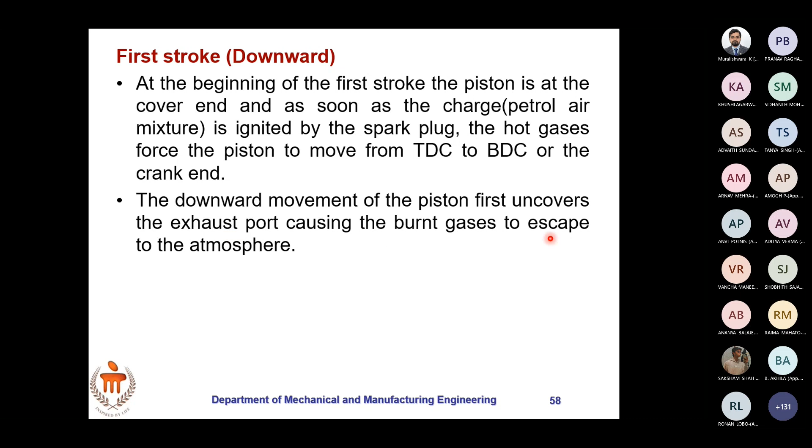As soon as the charge is ignited by the spark plug, the hot gases force the piston to move from TDC to BDC, the crank end. The downward movement first uncovers the exhaust port, causing burnt gases to escape to the atmosphere. Next, further downward movement uncovers the inlet port, then covers it, stopping the entry of fresh air-petrol mixture into the crankcase, and compressing the already drawn fresh charge in the crankcase.

As soon as the top edge of the piston uncovers the transfer port, during further downward movement, the compressed charge from the crankcase flows into the cylinder. This compressed charge entering the engine cylinder pushes the exhaust gases out of the cylinder.

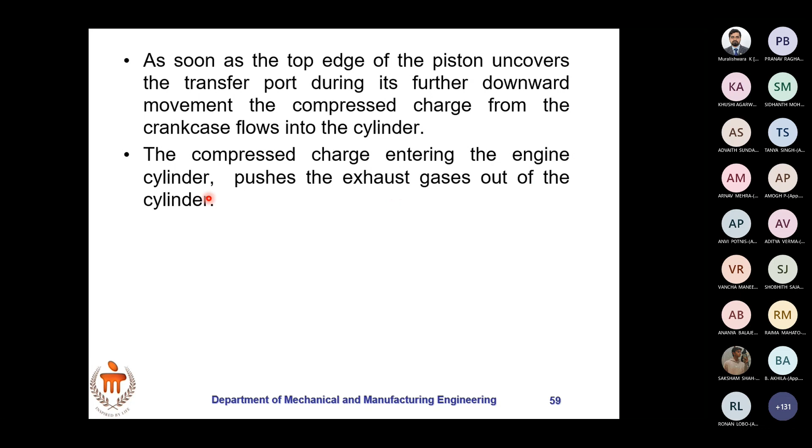This is called scavenging - the process of removal of exhaust gases by the fresh incoming charge. Look at this important point: the fresh charge displaces the burnt out gases. That is called scavenging, and all this happens during the downward stroke.

The scavenging continues till the piston covers the transfer and exhaust ports during the next upward stroke. During this stroke, the crank rotates half a revolution.

In the second, or upward, stroke, the piston moves from BDC to TDC. It first covers the transfer port, thereby stopping the entry of fresh charge into the cylinder from the crankcase.

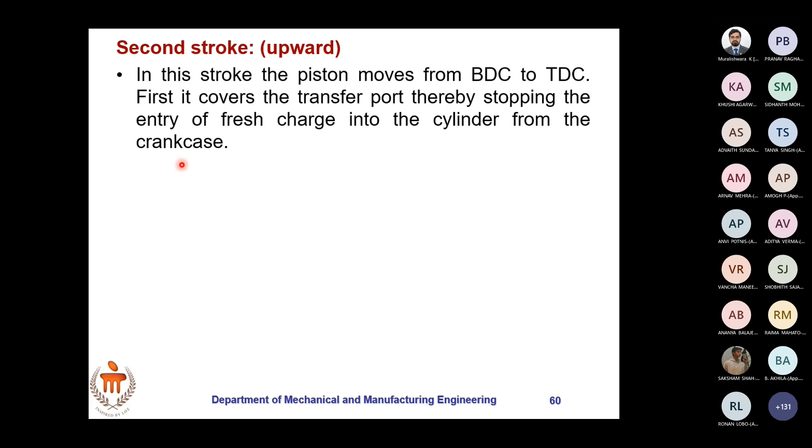With further upward movement, the piston uncovers the inlet port, creating vacuum in the crankcase, and fresh charge starts entering into the crankcase on the other side. Further upward movement, the piston covers the exhaust port, stopping scavenging, and compression of the petrol-air mixture in the cylinder takes place.

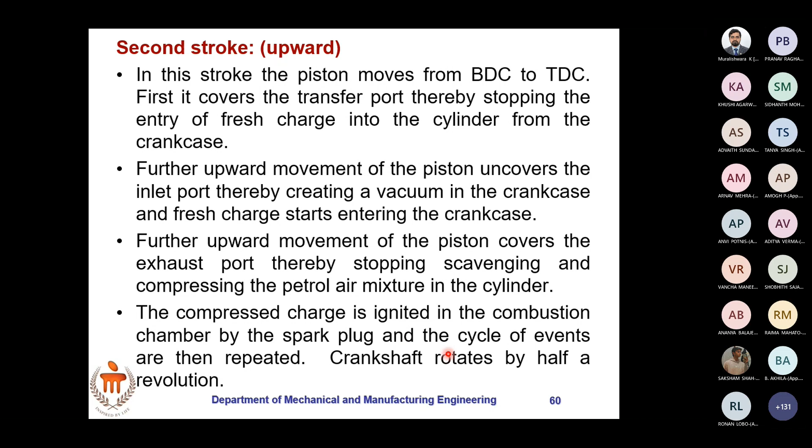The compressed charge is ignited in the combustion chamber by the spark plug, and the cycle of events repeats. The crankshaft rotates by half a revolution. So this is what is happening.

So, the concluding remarks for the 2-stroke petrol engine: this engine requires only 2 strokes to complete 1 working cycle, or all 4 activities. The crankshaft makes 1 revolution to complete 1 cycle, half revolution per stroke. The power is developed in every revolution of the crankshaft - look at that, every revolution you get power.

The energy developed in the first stroke is stored in the flywheel. Energy required to perform the second stroke is provided by the flywheel itself. A smaller flywheel is required since power is developed in every revolution of the crank, so it only has to supply power for half a revolution.

At the start of the engine, the energy required to perform the stroke is provided by cranking, as usual in the 4-stroke engine. To initiate the working cycle, cranking is required.

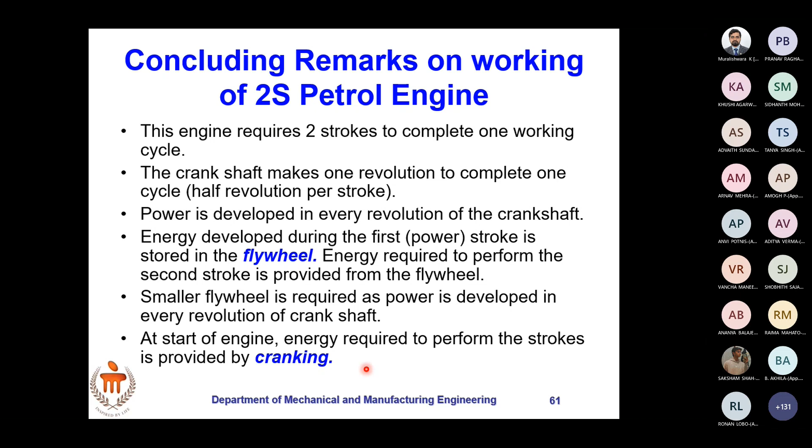Now the 2-stroke diesel engine is exactly similar to the previous case. The only difference is the spark plug is replaced by a fuel injector, and only air enters instead of charge. So during the downward stroke, look at what happens.

Only air enters, so air enters into the crankcase, and on the other side the fuel injector injects fuel so that burning takes place. The product of combustion exerts pressure on the piston face, and the piston is pushed down - this is the downward stroke.

What happens: first it uncovers the exhaust port, so burnt gases move out, and when the transfer port opens, the charge already entered in the crankcase enters the cylinder area, the combustion area.

During the downward stroke, this exerts pressure on the charge filled in the crankcase, so that it is pushed to the cylinder area, and not only that, it pushes all the burnt gases out to the atmosphere also. That is called scavenging - that's what happens in the downward stroke.

Further downward movement covers the inlet port, so that the air entry into the charge is completely stopped. This is what happens in the downward stroke.

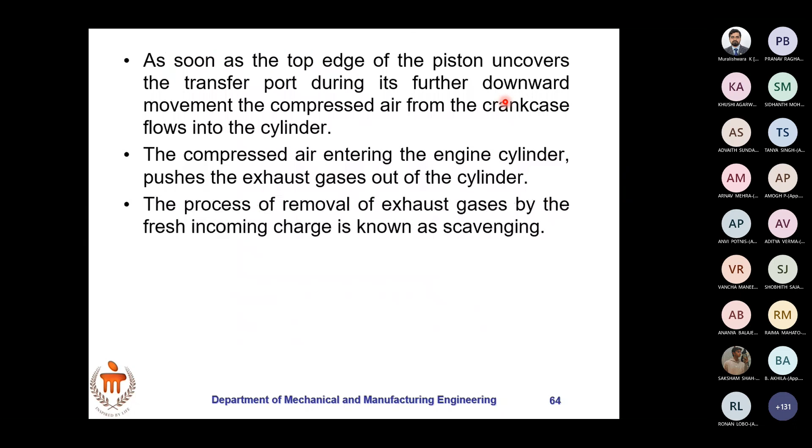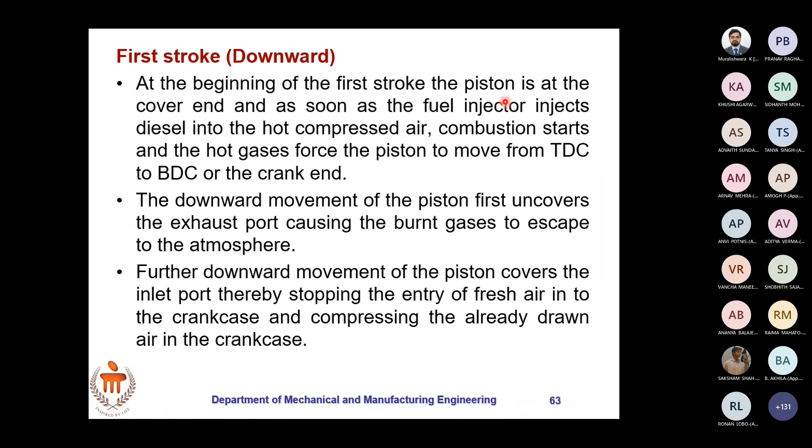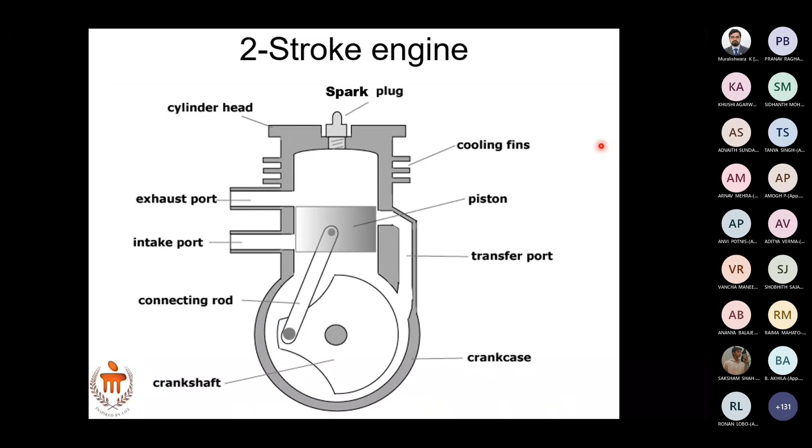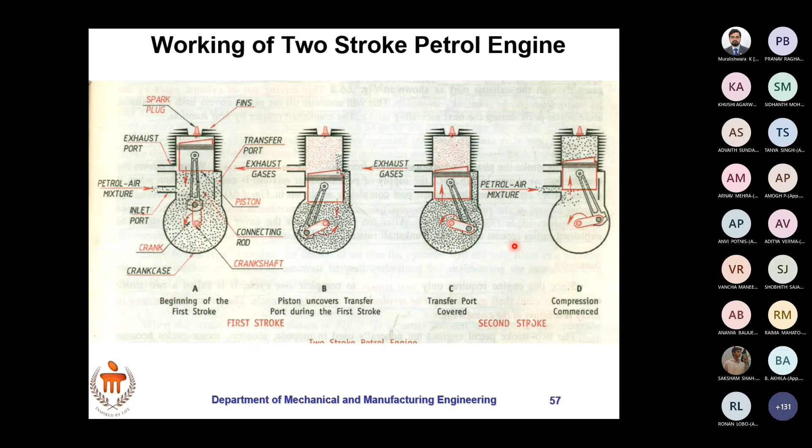Pistons are crowned, a taper type. This enables the burnt out gases to move out much easily through the exhaust port. So all two-stroke engine pistons are being crowned. What is the meaning of crowning? A slight taper is provided on the face, not flat pistons. This is one important thing I missed explaining in my previous class.

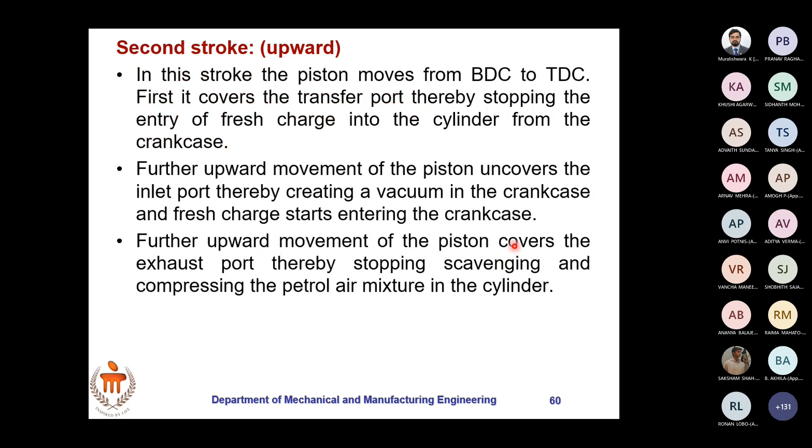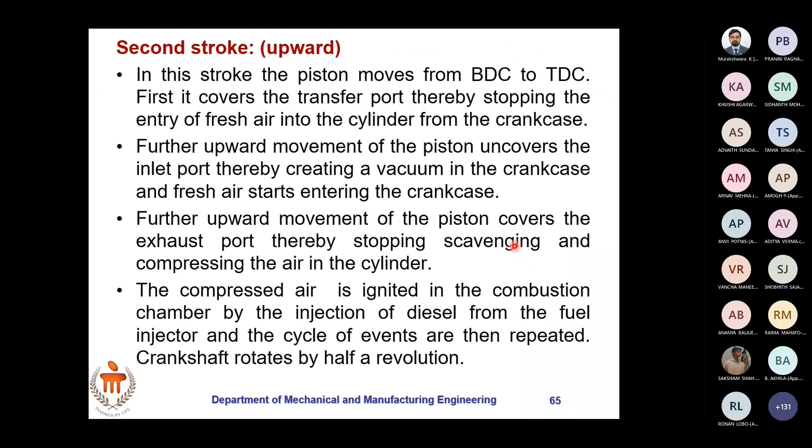All these pistons are crowned. Then we have comparison, conclusion, remarks on two-stroke petrol engine which we already covered in our previous class comparing four-stroke to two-stroke. Every alternate crank you will get power in four-stroke. Here in two-stroke, every revolution you generate power.

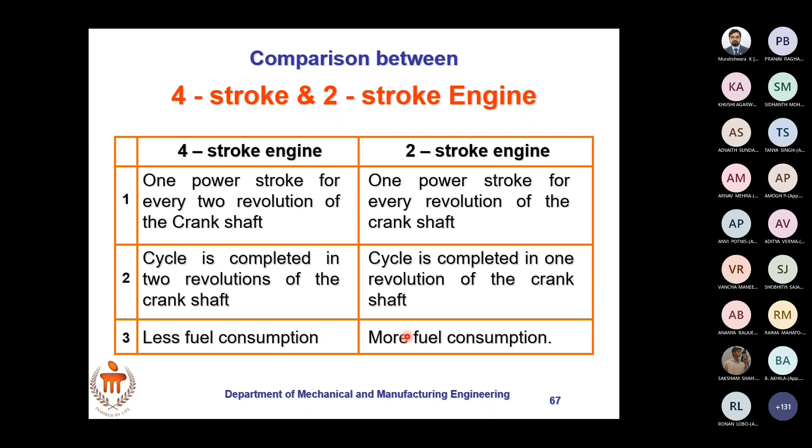So activities are more rapid in two-stroke engine. The vibrations are more, sound is more, and many problems are there. Cycle is completed in 2 revolutions for four-stroke, cycle completed in 1 revolution for two-stroke. Less fuel consumption in four-stroke, more fuel consumption in two-stroke, because there are a lot of unburnt hydrocarbons. Since there is absence of valves, some unburnt hydrocarbons and some fresh charge may go out along with the burnt out gases.

That's why fuel consumption is more. Higher thermal efficiency in 4-stroke because of complete combustion; lower thermal efficiency in two-stroke. Engine design is complicated in four-stroke because of valves, seatings, and cam operation - very complicated design. Here in two-stroke, just ports, and opening and closing of ports is done by the piston itself, by covering and uncovering the ports. Lesser rate of wear and tear in four-stroke, higher rate in two-stroke because it is very rapid.

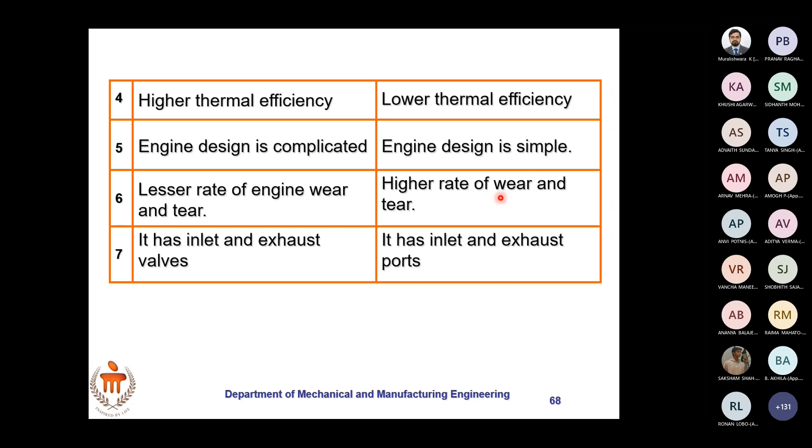Activities are very rapid in a 2-stroke engine, so wear and tear is more. Four-stroke has inlet and exhaust valves, two-stroke has ports. Four-stroke engine is heavy and bulky because of heavier flywheels, whereas the same power two-stroke engine is light and compact - no camshaft, no valve mechanisms, and no heavy flywheels in two-stroke engines. Whereas in four-stroke everything is there, that's why it has become heavy and bulky.

Two-stroke requires lesser cooling and lubrication... wait, four-stroke requires lesser cooling and lubrication while two-stroke requires greater cooling and lubrication. Why? Because activities are very rapid with more movement, so lubrication and cooling requirements are higher in two-stroke. In four-stroke, every alternate revolution power is developed and fuel is burnt, so cooling is much easier compared to two-stroke, where every revolution there is burning activity. Cost is cheaper for two-stroke engines.

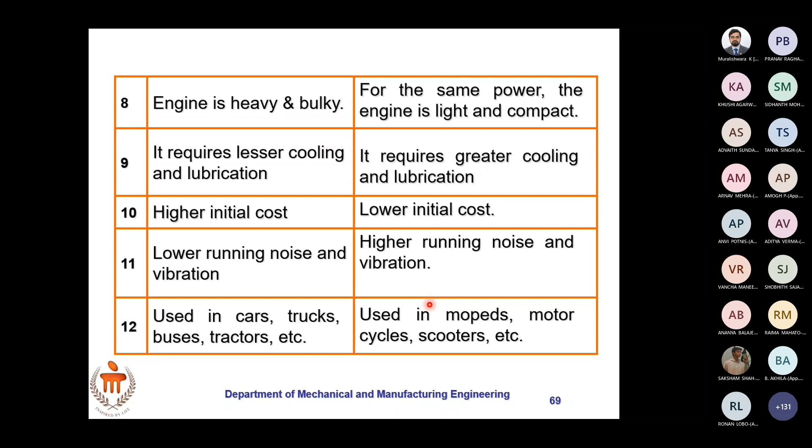You know the reason two-stroke engines are cheaper. Four-stroke has lower running noise and vibrations; two-stroke has higher running noise and vibrations. Four-stroke engines are used in cars, trucks, buses; two-stroke used in mopeds, motorcycles, scooters - but this is pertaining to our old concept. Nowadays, because of efficiency, all scooters are also four-stroke. This is pertaining to previous designs. Now these two-stroke engines are very rarely used because of expensive fuel and poor efficiencies.

Are there any questions? No, sir. No sir, okay then we'll go to... Sir, one minute, can you explain the crowning of the piston again? Crowning, okay.

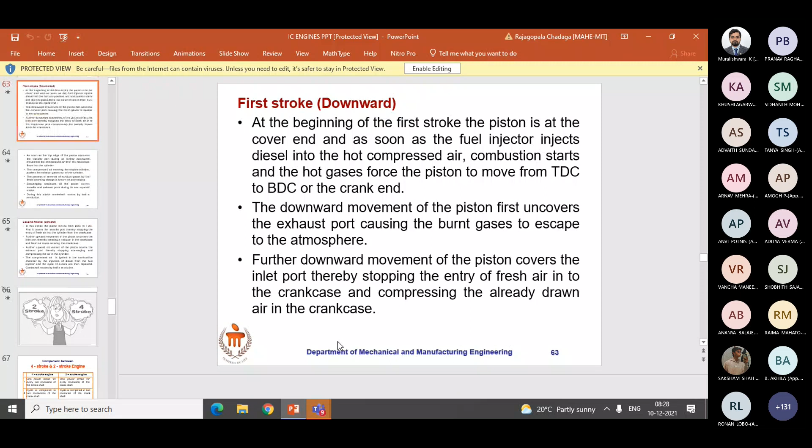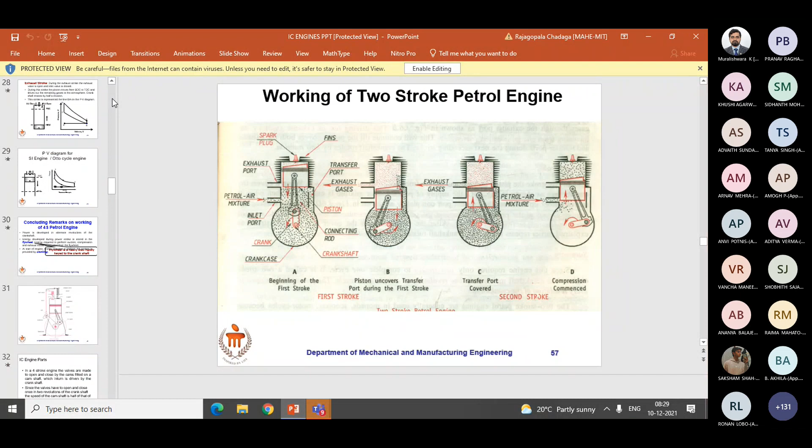Look at that crowning shape. Piston shape in two-stroke engines are just tapered towards the port side. This is called crowning. Whereas in case of four-stroke, one minute - four-stroke pistons are flat, this again is two-stroke. Look at that, they are flat. Have you noticed this? In a four-stroke engine, pistons are flat. But in a two-stroke engine...

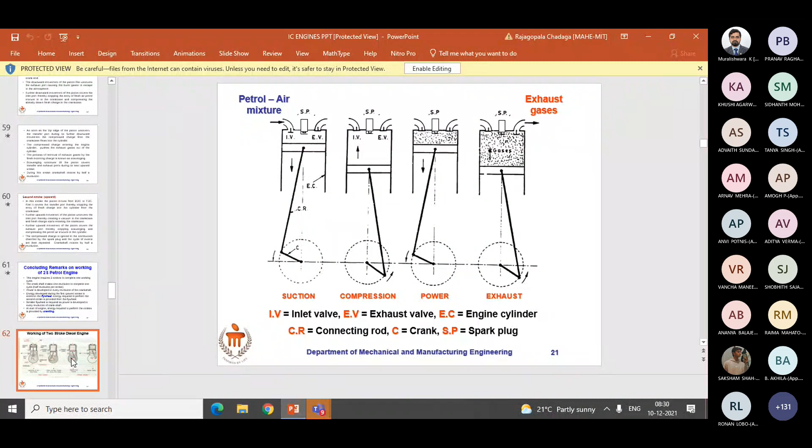Look at that, they are crowned, they are not flat. Intentionally they are made like this - a small taper is provided on that, so that there is easy flow of burnt out gases through the exhaust port. It provides some provision, some easiness through which the burnt out gases can move out. That's why they are called crowned, these pistons are crowned. Okay, sir.

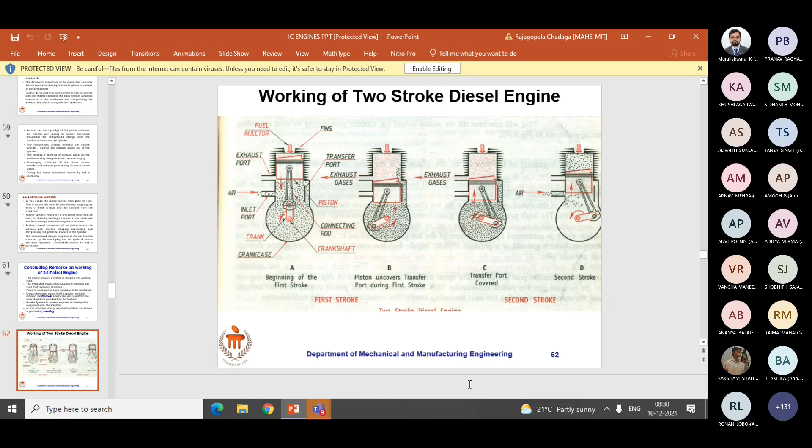Next, we will go to IC engine relationships.

The first is indicated power.

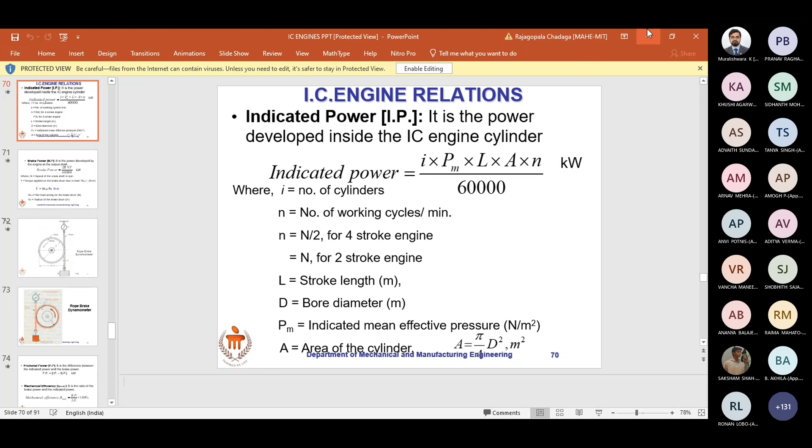So that completes your internal combustion engine. We studied basic engines like two-stroke engines, four-stroke engines, petrol engines, and diesel engines - only 4 varieties. Now we will see the performance of these engines, because many times we talk about efficiency and fuel consumption. These are the critical parameters in any internal combustion engine, so that the performance of IC engines can be evaluated.

Usually, while a vehicle is moving, the only way we can find its efficiency or capacity is by fuel consumption - agreed? So one liter of petrol, how much distance does it cover? But most of the efficiencies are calculated in laboratories when the engine is fixed in a foundation. Most of their performance is evaluated in laboratories when the vehicle is not running.

In fact, the engine is installed in the laboratory, and the crankshaft of the engine is coupled to a brake drum dynamometer, something like a brake. How the things are evaluated: how much energy is required to stop this crankshaft by applying the brake.

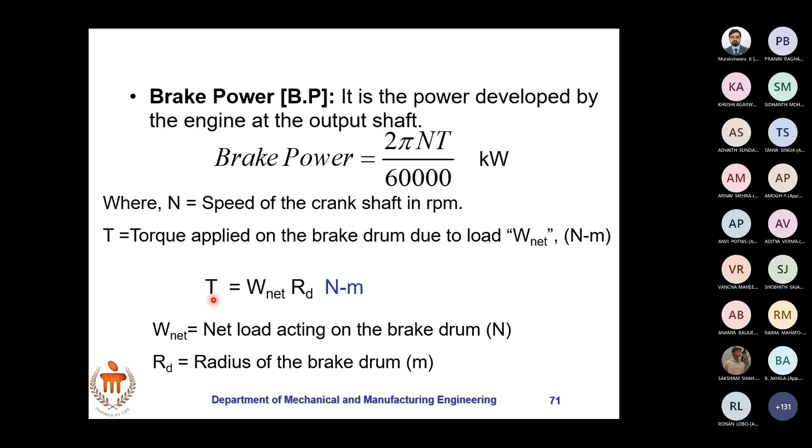That's how you can estimate the actual power available at the brake shaft. This is nothing but the brake shaft, this is actually the engine rotating crankshaft. So how much power is available is estimated by putting the brake. We are actually stopping that. How much energy is required to stop this engine, that much power is available in the brake shaft.

So that instrument is called dynamometer, to measure the brake power. Okay. So next is friction power.

So why is brake power less compared to indicated power? That is because a lot of it has to overcome the friction. So it is the difference between the indicated power and the brake power. IP minus BP is nothing but friction power, again in kilowatt.

And now one of the important efficiencies, mechanical efficiency. How much mechanical efficiency is the ratio of brake power to the indicated power into 100. BP by IP into 100, it's the mechanical efficiency.

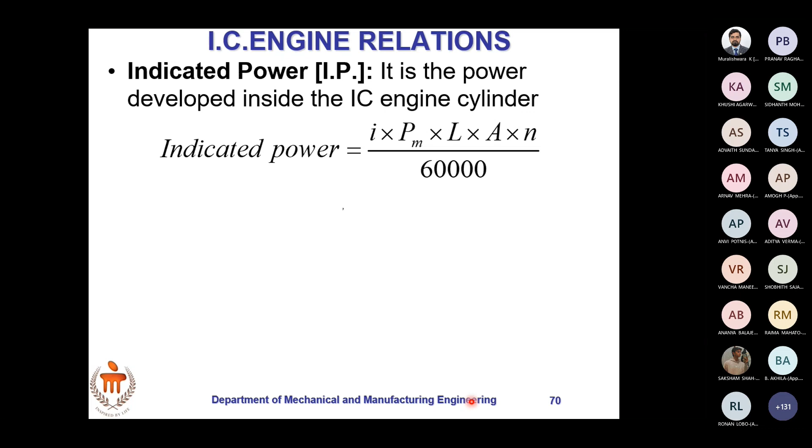This is the important IC engine relationships we have studied today. One is indicated power, IP, which is the actual power developed inside the cylinder, given by i into Pm into L into A into n by 60,000, with explanations already given.

Next is the brake power, the power available at the crankshaft. This is estimated by putting the brake, that's what is called brake power. It is equal to 2 pi NT by 60,000.

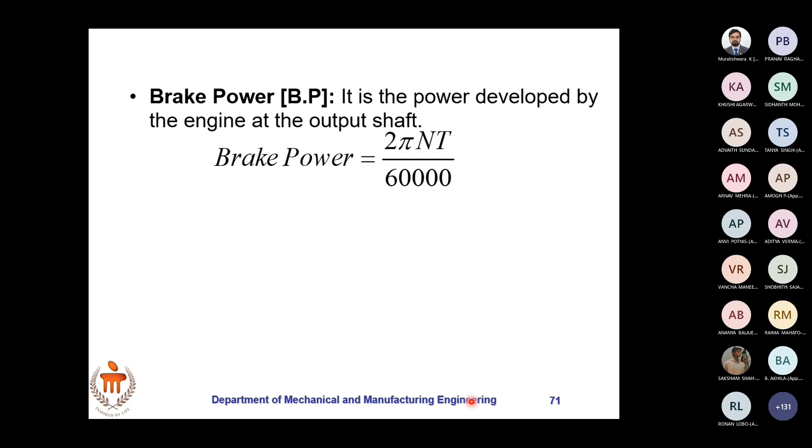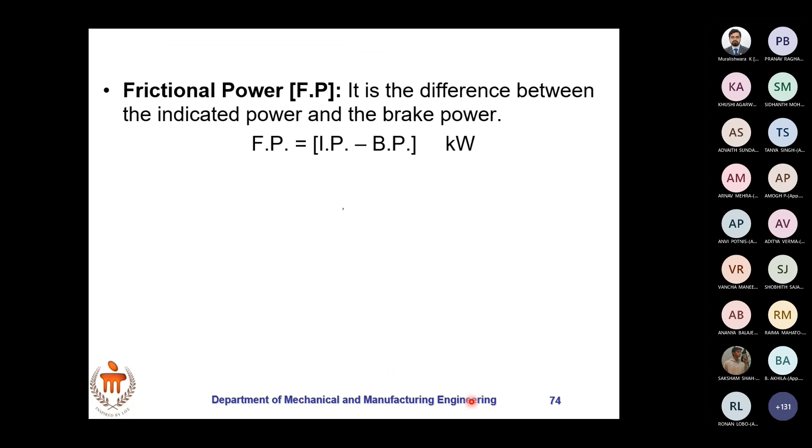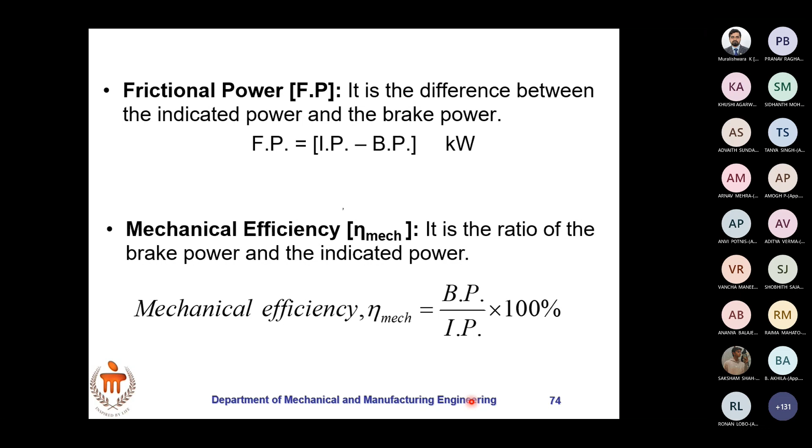The next important thing is brake thermal efficiency, how much fuel we are burning versus how much work we actually extract. That is very poor, only 25 to 30% brake thermal efficiency. BP by the quantity of fuel burnt, times its calorific value, shows this much energy spent for only a small quantity of power obtained. This is a serious concern in internal combustion engines, and pollution is another big problem.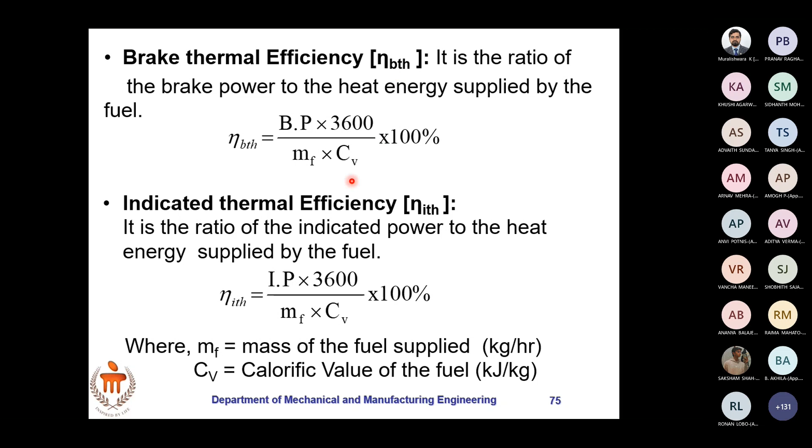Another one is indicated thermal efficiency. So these are the important performance parameters found in internal combustion engines: mechanical efficiency, brake thermal efficiency, indicated thermal efficiency, brake specific fuel consumption, SFC, and piston speed.

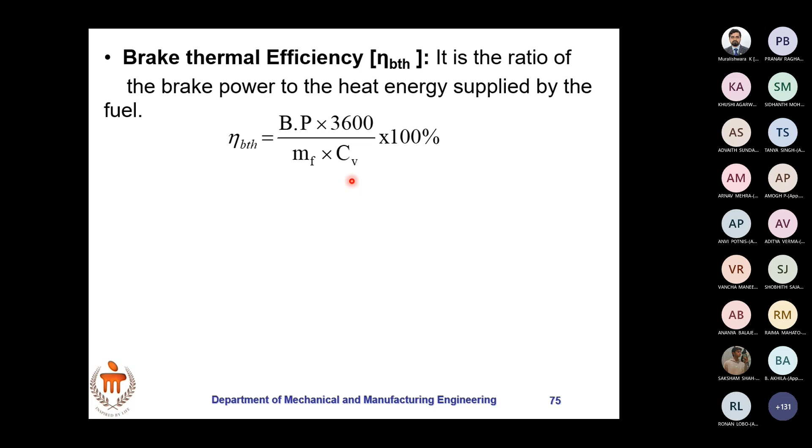Could you show the previous slide, sir? Show the previous one. Slides? Brake specific fuel consumption, okay. Will there be any other quiz, sir? No, no, only one quiz. Okay, we'll break for 10 minutes, then we'll resume and solve some of the problems based on these equations. It is 9 o'clock, 9:10 we will start.

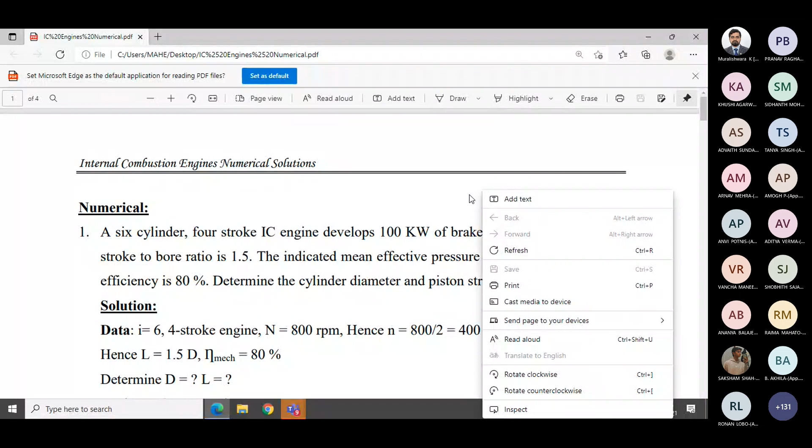So look at that. What is this 6 cylinders engine means? There are number of cylinders are 6. And what is this 100 kilowatt? It is brake power, BP is given as 100. And what is 800 rpm? N, speed of crankshaft is 800. And stroke to bore diameter, L by D ratio is 1.5.

And indicated mean effective pressure, that means PM, which is measured using planimeter, is 8 bar. And mechanical efficiency is given 80%. You have to determine the cylinder dimensions and stroke length.

Okay, these are the data. Can you able to extract this data?

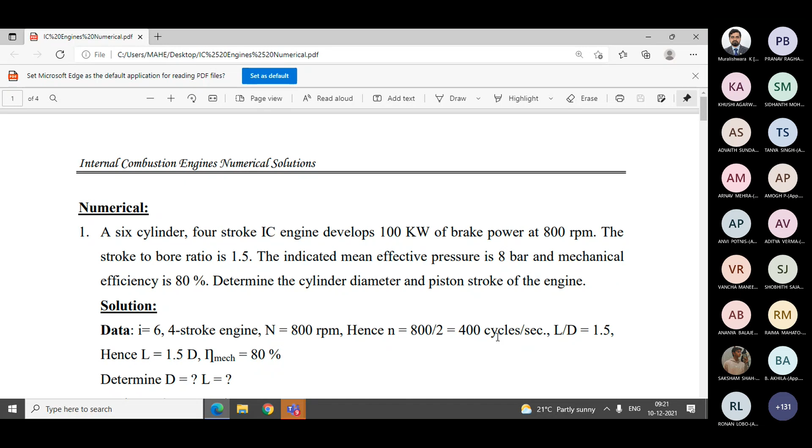6.92 D, how much? 6.92 around. In what unit? In meters, sir. Yes. 6 meters is too big, not proportional. Somewhere your calculation is wrong, look at that.

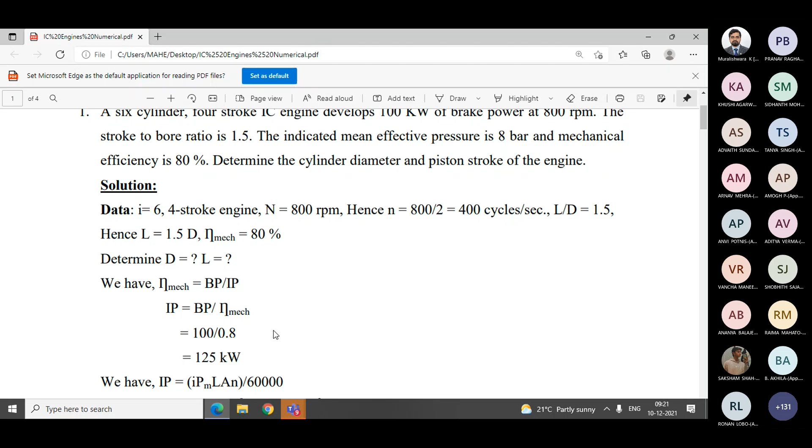IP, BP and mechanical efficiency is equal to BP by IP. So if you do by 0.8, 125. Then you have the equation IP is equal to this equation. So 125 is equal to 6 into 8 into 10 raised to the power of 5.

L I will substitute as 1.5D. Then pi D square by 400. Pi D square by 4 divided by 60, by 4 is here, look at it, divided by 4. That is the area, pi D square by 4. N is 400 by 60,000. D cube is this much. D value is this much.

Check again. Look at that. So this you followed, isn't it?

125, then look at that. I, PM, L is 1.5D, A is pi D square by 4, 4 is here, N is 400. Why? It is a 4-stroke engine. Divided by 60,000. D cube is this much, D is this. 0.149 meters or 149 mm.

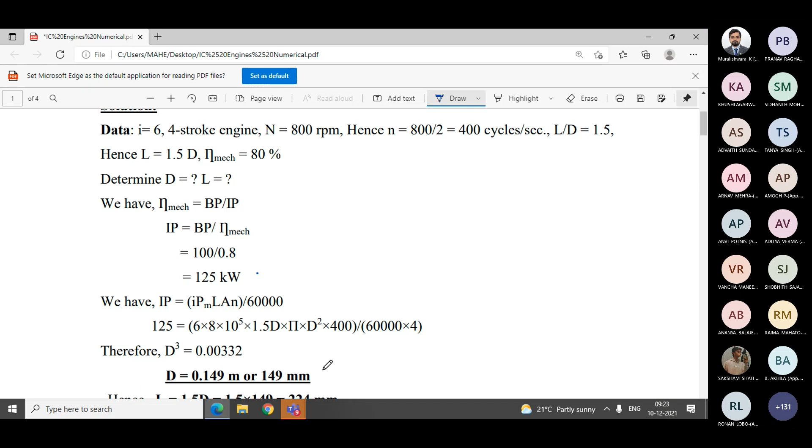Is it clear? Next, if yes, D sir is 149 mm, then length is 1.5D, 224 mm and 149 mm.

So it is a 6-cylinder multi-cylinder internal combustion engine. It develops brake power of 100 kilowatt and running at a speed of 800 rpm, and mean effective pressure is around 8 bar, and it has mechanical efficiency 80%, and your stroke to bore ratio 1.5. You can easily find the size of the cylinders, diameter and stroke length.

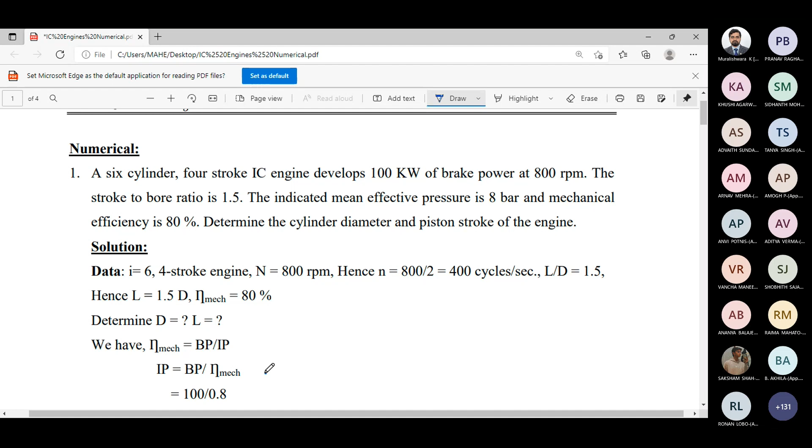So first you have to find out IP. BP by IP, 100 by something, IP is equal to 80 or 0.8. So IP is 125 you will get. And IP can be equated, IP equations. You know IP is equal to I into PM LN by 60,000. IP is 125, number of cylinders 6, PM is 8 bar, 8 into 10 raised to the power 5 newtons,

and L is 1.5D. A is area of bore, pi D square by 4, look at it here, and N is 400. Why? It is a 4-stroke engine. Always N crankshaft is half the speed, because working cycle is every alternate revolution. So 400. So if you got D cube, you will get

0.00332. Then D is 0.149, it is in meters. So convert it to millimeter, 149, look at that. And if length is around 224 millimeter.